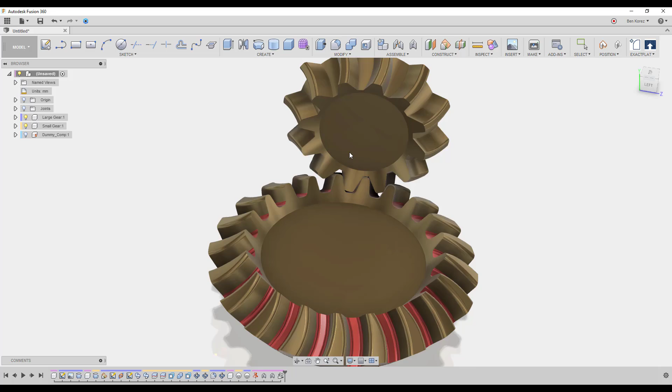From now on, after I show you, I'm also going to add a link in the comments to the file, so you can download it and play with it, and see exactly how I did it - you can just reverse engineer it. I'm also going to show you how you can create an animation out of it, so you can see how it's moving, and it works really nicely, perfectly synced too. I'll show you how to do that as well. It's very simple, so let's start.

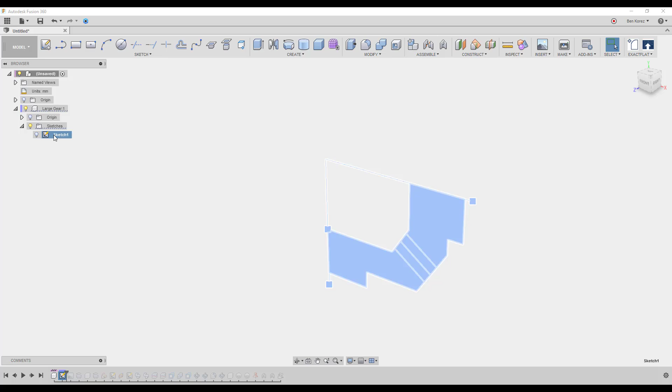Okay, I'm just going to scroll all the way to the beginning here. There's no point starting the sketch from the beginning, so what you can do is scroll like this, then freeze the video and copy the sketch here with all the dimensions. I don't want to waste time, because this profile - just imagine when you have a gear, you cut it in half, and that's the profile, that's how it looks.

I don't know exactly what profile you want, so you can sketch the one you want with the right angle for the cylinders. This here, you can see, is 90 degrees. Maybe yours is going to be less, so you'll do it with fewer degrees. I'm just going to show you a typical one, transferring energy and power from one to another at a 90 degree angle, but it works exactly the same for all other angles, so no issue with that.

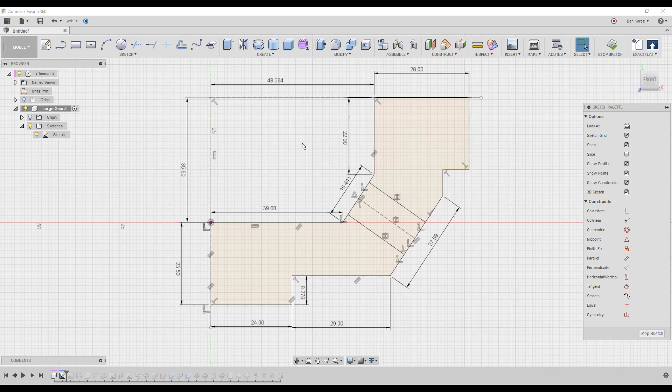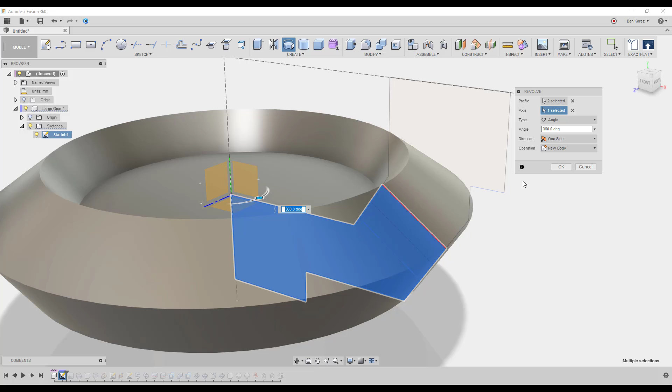So you froze it, and now you're back. Next, we're going to start by using the revolve tool - let me turn this back on. Which one you choose, the top one or the bottom one, doesn't matter. I'm just going to use this one here, and you'll see in a moment what I'm talking about. I'm going to take those two here, and select this line here as my axis center.

I'm going to click OK. Now I'm going to create a new component, and here I'm going to call it small gear. I'm not going to copy the sketch from the first one to this one - there's no point. If you want, you can do it, you can draw it from the beginning, but in this example I thought it might just waste time, so I'm going to borrow the sketch from the big one.

Okay, you can see here I've made a mistake - I forgot to activate gear 1, so the body actually got created at the top root component. So just remember to activate the component you're working on. I'm just going to drag and drop it here - it's not going to let me. Let's see if I need to activate this one maybe. Okay, it's not going to allow me, so I'm just going to go back and try it again.

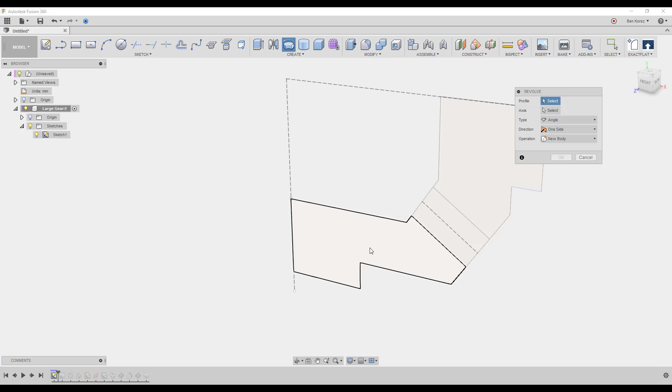Remember, activate it. Okay, so here again, I'm going to select these two here, select the center - it's this one here - and we click OK. And again, we're just going to create a new component.

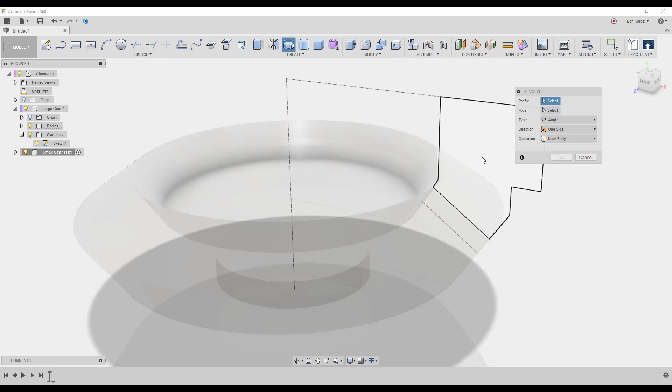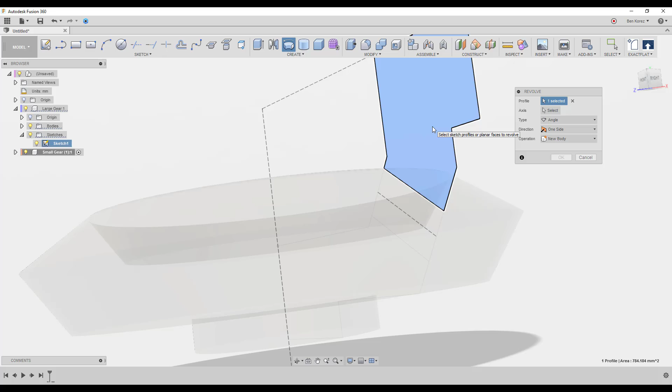Small gear. Good. So as I said before, I'm just going to borrow this profile here, the top one. Again, we're going to go to the revolve, and I'm just going to choose this one here at the top. So the small gear, it's like kissing the other one here, but don't worry, because from the big gear, the large gear, I'm going to cut the profile of the tooth, and from the small gear, I'm going to create a tooth for it.

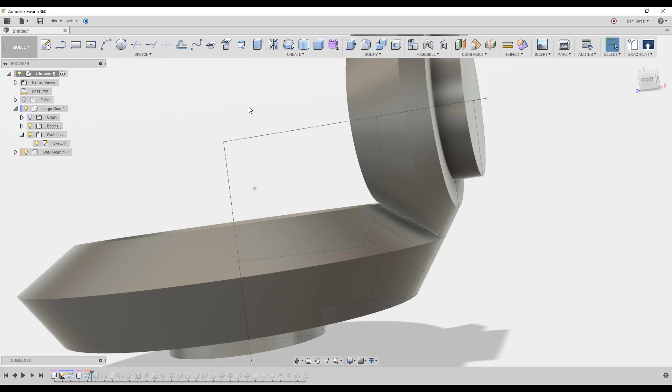And it's very, very simple. I didn't hit it correctly. Here we go. So now we have like two gears. Basically, they are touching each other.

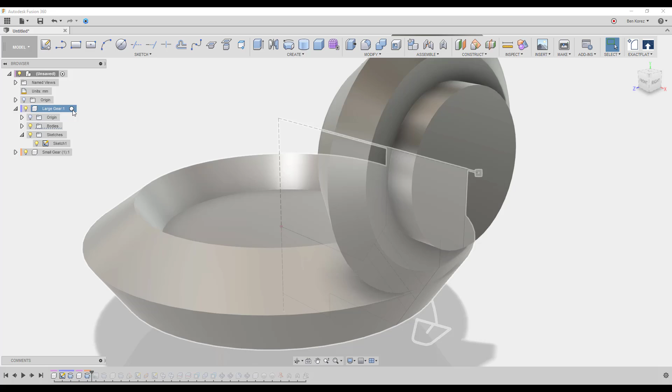Good. Now we are going to work on the gear, but we need to first create the path that we're going to use for the gear. As you've seen, it's kind of with an angle, and so we're going to create it on the large gear. This one we can just turn off for now.

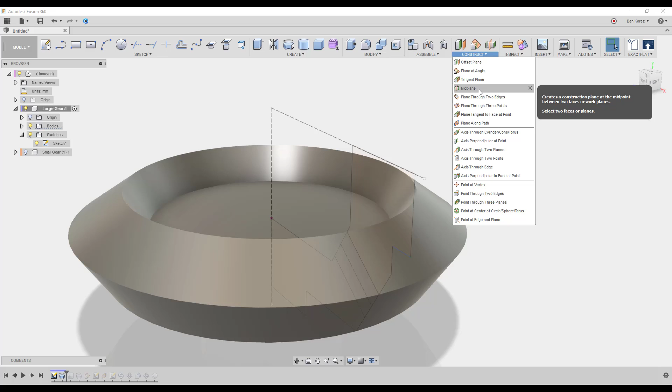Now the best way I found, instead of using a construction line on a tangent plane, it didn't work out as I wanted. So what I'm going to use is the normal plane at angle. I'm going to use this one here, which is close to the surface, and just put 90 degrees, as you can see here. It's touching, and we're going to click OK.

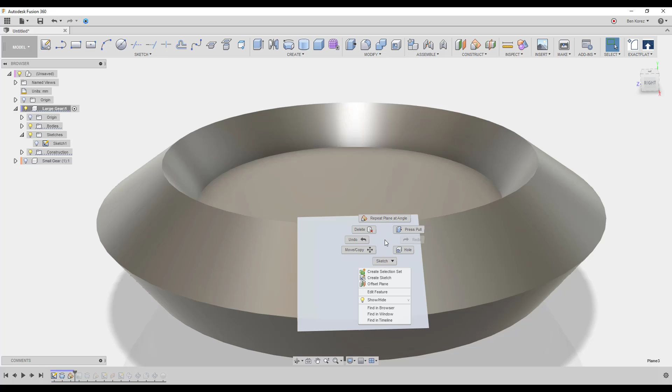Now we can just turn off the sketch, and I'm going to select it, right click on it, and create sketch. So you can see we're right in the center. Everything looks really, really nice.

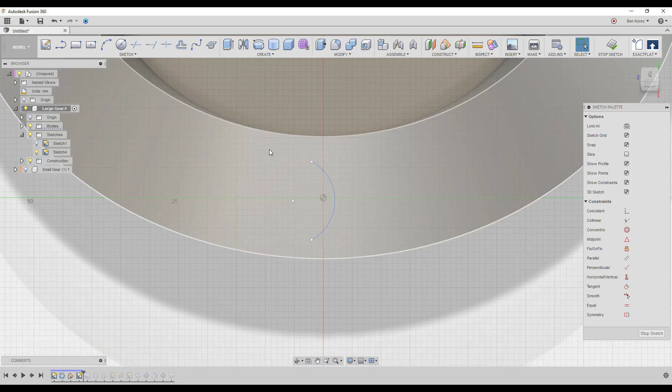So now we're going to take the arc 3 point, that's what I did, pretty simple, and we're just going to draw something like that. And I'm just going to give some dimensions. I'm going to give it, let's just see, 33.782, but it can be any dimension you basically want.

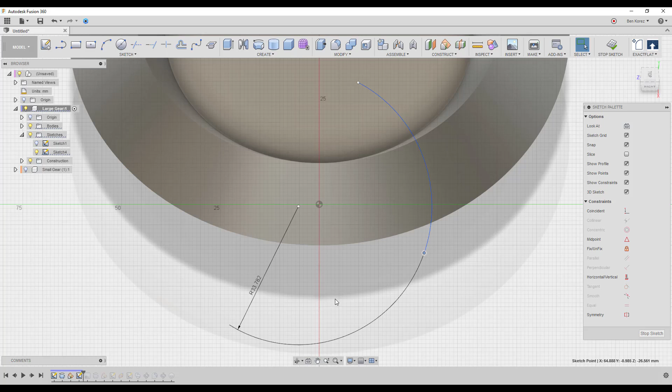And don't worry about this. I know it looks kind of whoa, what's going on, but don't worry. So first I'm going to make a vertical constraint between this one and this one. It's very important. And next I am going to create a vertical constraint between the midpoint of this arc and our origin here. Good. Now the distance is going to be between this point and this point.

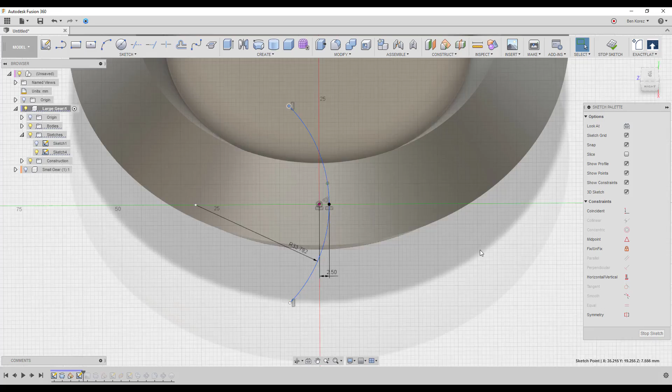It's going to be 2.5, like this. Now this one we can just make it shorter. Let's see. Can make it just a little bit shorter. I don't need it that long. So yeah, I think here it's okay. It's fine. I can live with that.

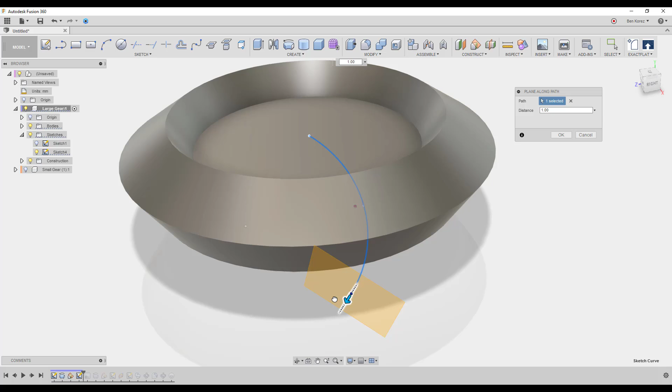And yeah, so here we basically created the path that we're going to use, and you're going to see in a moment how. Now we're going to the construction plane, and we're going to choose plane along path. So we're going to use this one. Make sure that it's at the beginning. If you are changing it, sometimes it can change the shape also, but you can play with that and see if it makes any difference for you. And now we're going to click OK.

We go into this plane, right click and create sketch. Now that, just don't let it confuse you, this is like a little bit, it's not straight, so don't worry about it. So we're going to draw a line here. Now we're working on the profile of the tooth, okay?

So we're going to go to the midpoint because I wanted to create it right here in the middle. And yeah, we're going to create now another line, smaller one right here. Click OK, and I'm going to create a vertical here between this middle and this middle. I want to make sure it's always in the middle, and I'm just going to create a line from here to here and another one from here to here, so everything is equal.

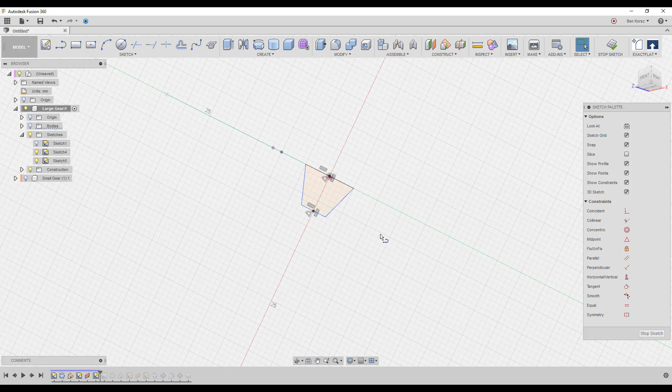And yeah, we're going to start to put some dimensions. 10 millimeters, that's good. Now from here to here, it's going to be 9 millimeters. Again, it's up to you, the sizes. It's just something that I've tested before, and it works really nice. The bottom here, it's going to be 5 millimeters.

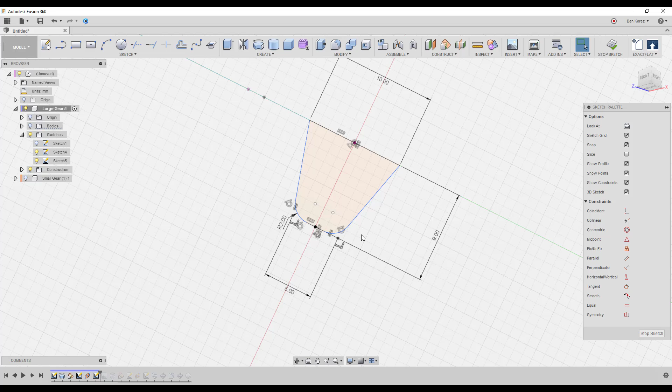And now we're going to create fillets. Normally we're using features to create the fillets, not so much in the sketch or the geometry. Try to avoid that, but in this case I'm allowing myself to do it, and you can also allow yourself to do it, but it's again up to you how you're going to do it. And this point here and this point here, it's going to be 2 millimeters. And I guess that's it. That's our profile, and we can shape it later on if we need to.

If you want to make it round, you can use for example the 3-point arc, or even if you want to go even more wild with it, you can just go with the spline.

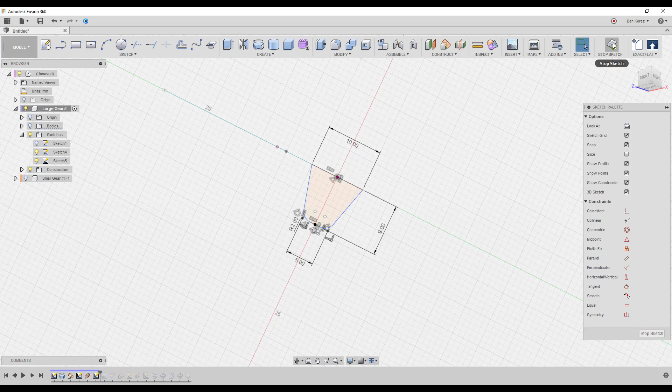So we can stop the sketch. Now we have our profile and we have our path. Just need to turn our body back on. And yes, here the fun starts. Now we are going to leave it as it is here.

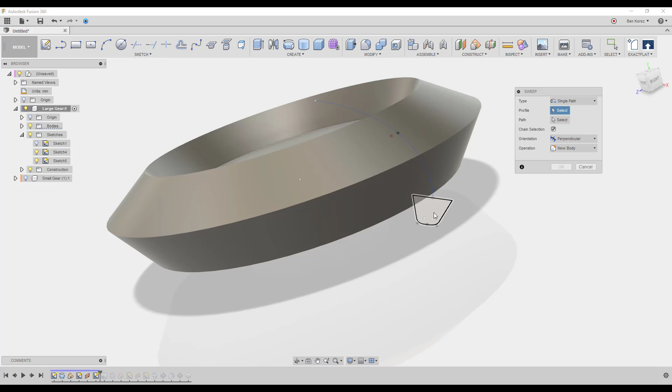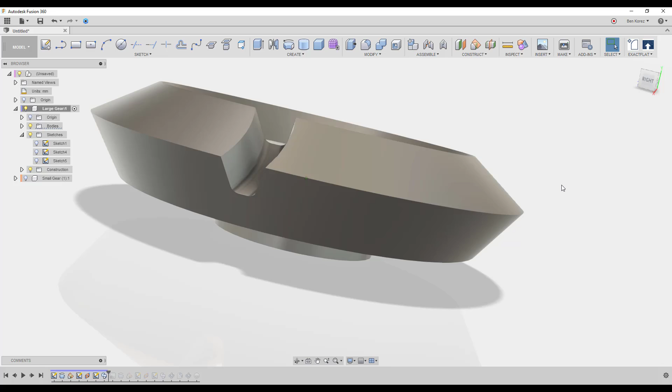We're going to the sweep command. We choose this profile and this path. Boom, we cut it. Make sure it's on perpendicular, okay, and not parallel. Click OK, and here we go. That looks really, really nice and clean cut we've got here.

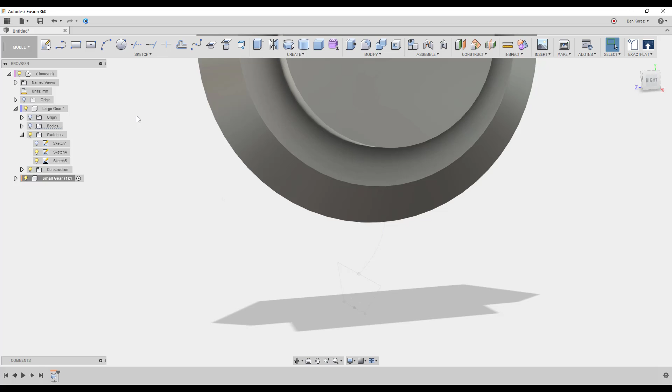Next, we are going to use these 2 sketches on the small gear. I don't want to redo it, waste of time. So what I'm going to do here now is, again, we're going to the sweep. Choose this profile, select path, and look at that. Looks really, really nice. But there is some work to do here.

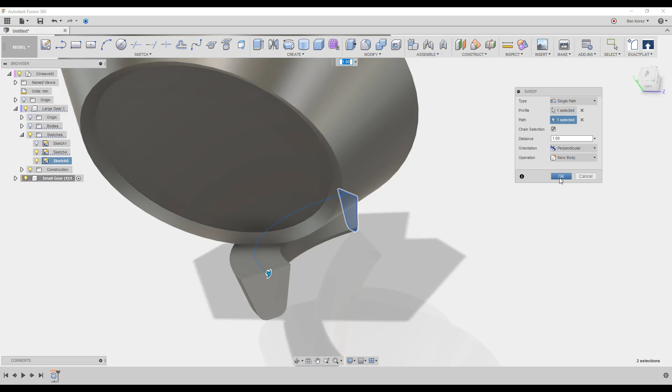I'm gonna leave it as a new body, okay? Make sure it's also perpendicular. If you want to see how it looks, it's a little bit hard to see it right now, but you're gonna see it in a moment, because now we need to cut all those excess.

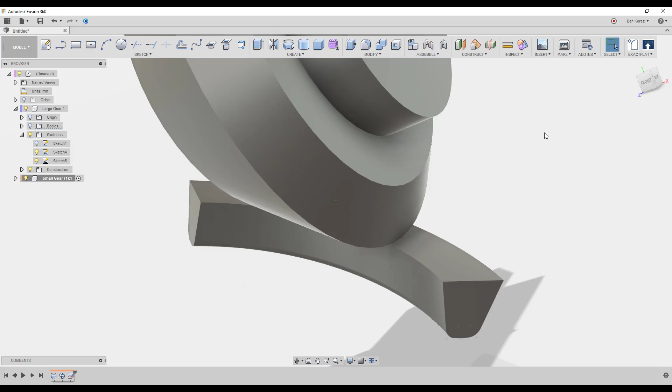It's extremely simple. We're just going on to the split body. We choose this one, and the split tool, it's going to be this face here, and we cut it. Then again, right click, split body. Now we are working on this side here, and we're choosing this face here, and here we go.

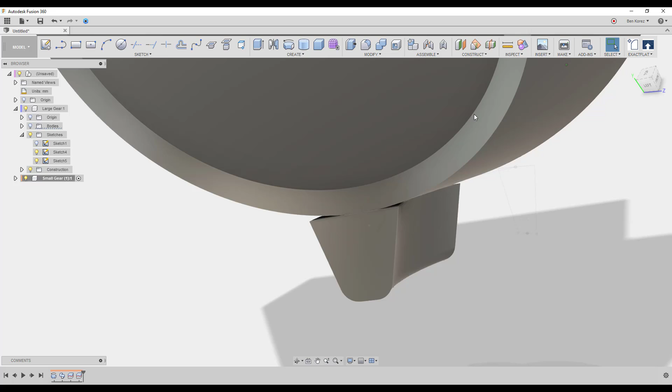I'm just gonna select this one and hit V on the keyboard to hide them. We don't need them anymore. But are we done? No, because it's not 100% touching each other, of course, because this one is flat, straight, and it's not round, so it can't fit on this face. So what are we going to do?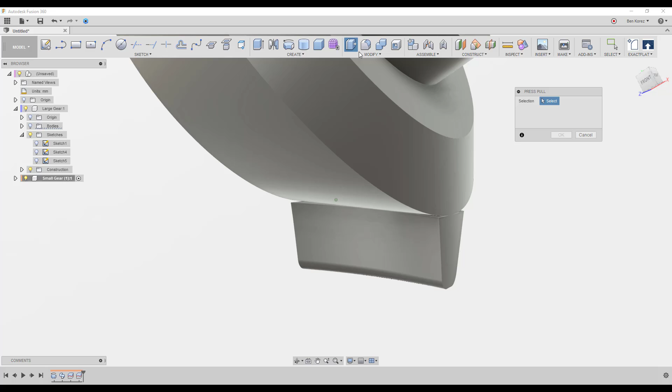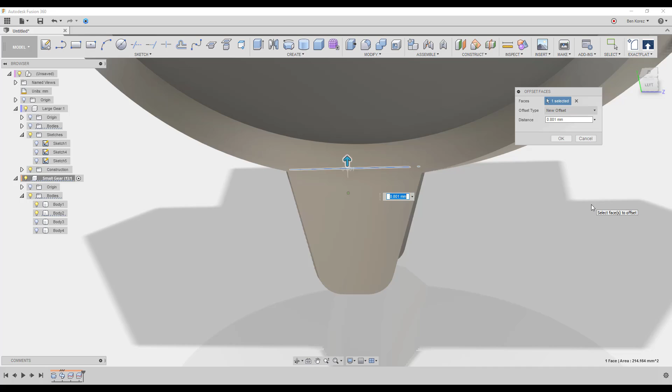Very simple. Basically, we can already now turn these 2 sketches off, and we can just go into the press pull and look for the face here. If you want, to make it easy on us, we can just go in here, turn this one off for a moment, then you can turn it back on. Now we just need to push it just enough so everything is going to be inside, okay, something like that, and we click OK, and look at that.

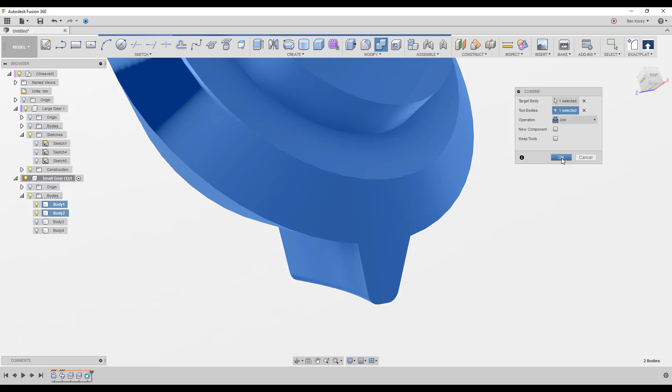Looks really, really nice. Next, we are going to combine it together. This is our tool body, and this is target, and we don't want to keep it, we just join, and we click OK. So here we got our first tooth, and we also have the other side.

So let's see them, both of them together, how it looks. You see it fits perfectly, exactly how we want it. More precise than this you're not gonna get. I don't think so.

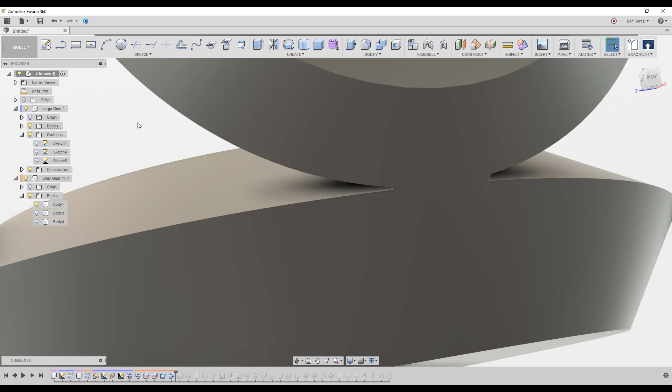Next, what we are going to do, because we need to create some clearance, we need to do it now before we start multiplying everything around. Now you can shave the amounts that you want for both sides.

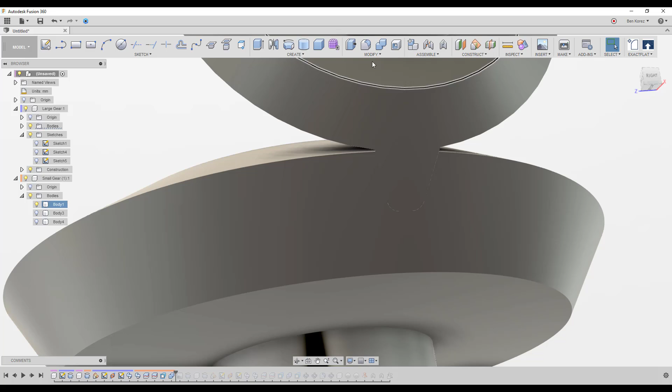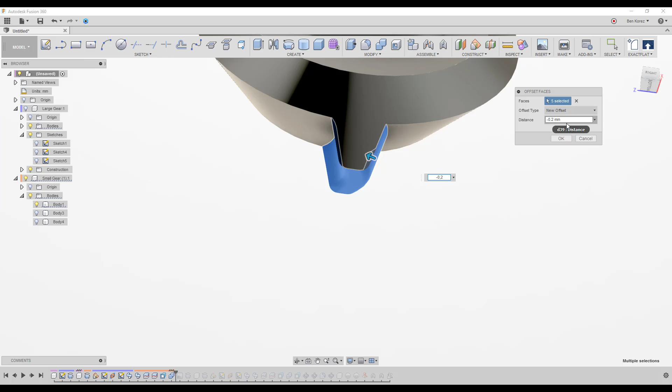For example, let's just say here, we're going to the press pull again. We're going to select those faces because we're going to shave from everything, new offset. We're gonna say minus, to give a clearance of 0.4 millimeters. So I'm gonna shave from here 0.2, click OK. You can always test and see if it's okay.

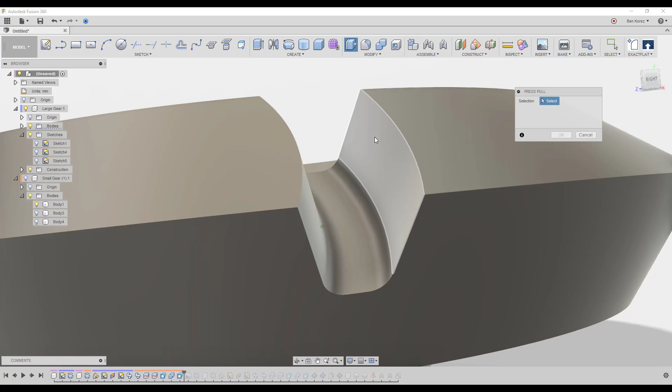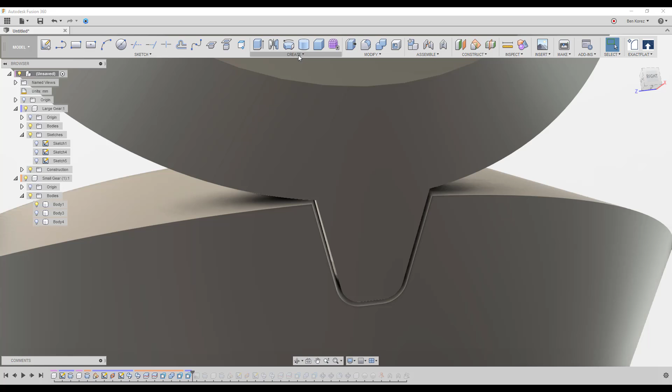And then I can go in and turn this one off and make sure there are no glitches here. Everything looks really, really nice. Go to the press pull here, select all those faces, make sure it's a new offset, and again minus 0.2, and turn it back on, and here you go. So it's equal on both sides. Or you can also, if you don't want to write anything, you can go in here and create some kind of a parameter, so you can just use that.

And yeah, I like it. I don't know about you, but it looks really nice.

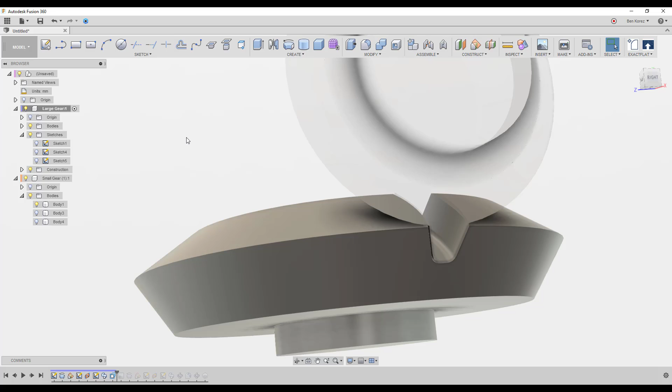So we can start, we're almost basically done. Nothing much left to do.

It's just, you know, use the pattern. We're gonna go to the circular pattern, make sure that it's on faces, and select all those faces and select the axis. Doesn't matter which of them, and I'm gonna give it 21.

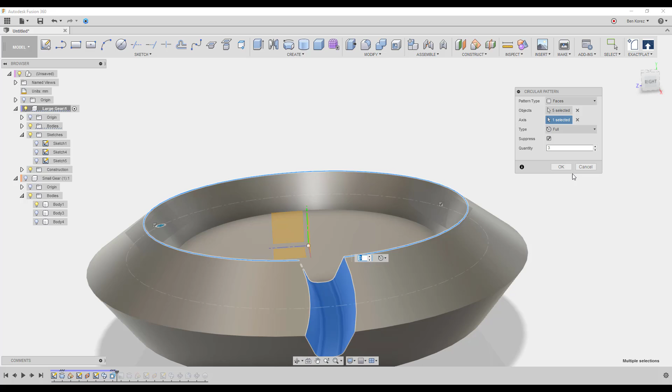It fits really nice over here. There are some websites where you can go and make all the calculations that you need, or maybe you already have everything you're gonna need, the amount, so you can do it yourself. Of course, it also depends on the size and everything.

So, but you know, it's the same, it doesn't matter which size it is. And so here we finish with this one, and we can just work on the, let me just see where this here, the center.

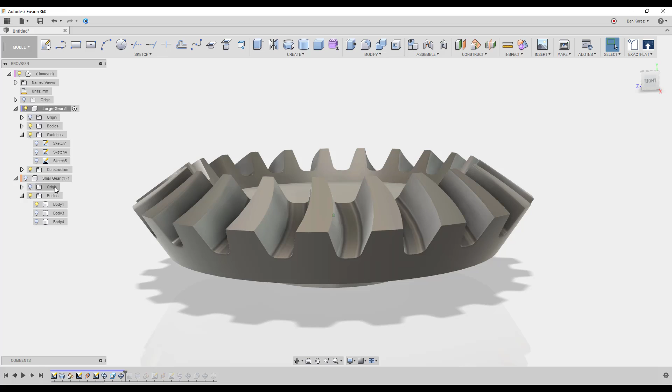Here we can just give them some fillets on both sides. You can also give it 2 millimeters, and here we can just go into, sorry, circular pattern, and we can choose feature. Let's see if it's gonna work.

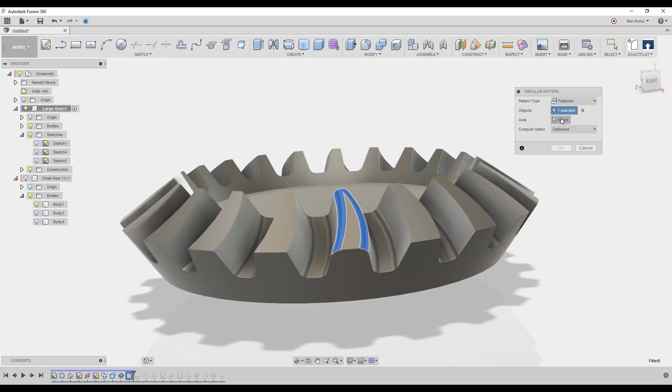Sometimes it's working, sometimes not. Yeah, God knows, I'm just gonna choose this one. How many? 21. And we hit OK. And it worked fine. Excellent.

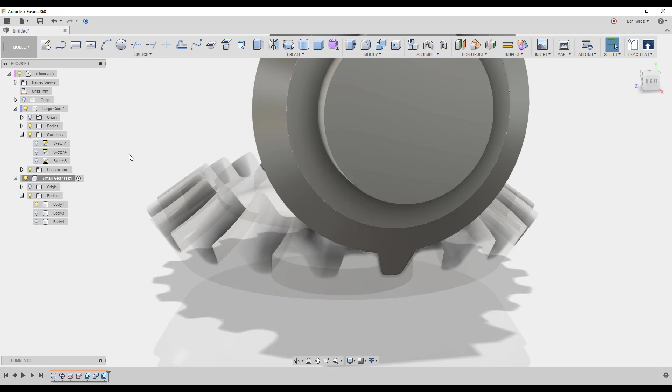Next, what we're going to do is we're going to move to the small gear. Okay, we can just turn this one off for a moment, and everything looks really nice here.

If I want, I can also create some fillets here, you know. I don't know.

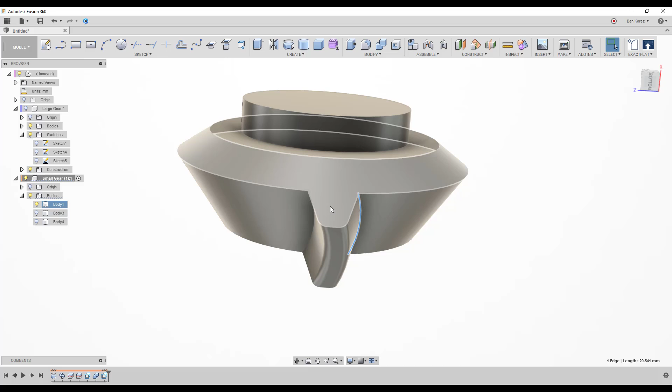Let's make some fillets here, see how it's going to be, and give it also maybe 2.

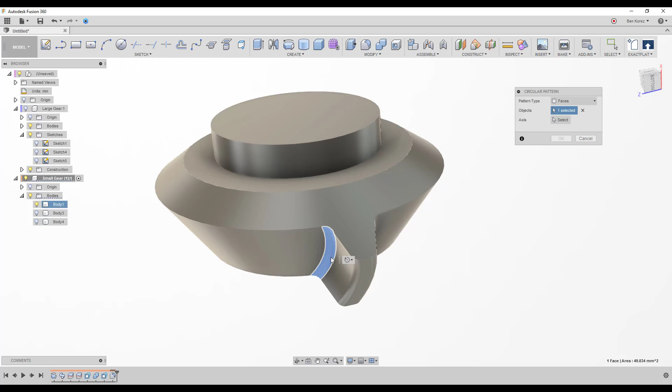And so we go into the pattern, circular pattern. I'm gonna choose faces. I want all of these faces.

And we're gonna select an axis, and we're gonna start scroll up.

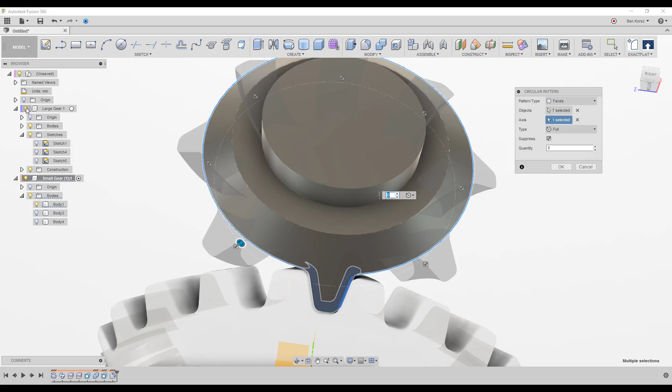I already know how much I need, but I can show you if you're not sure how much you need. So it's quite easy to figure it out. You can just turn the other one on and then just add until you see it fits.

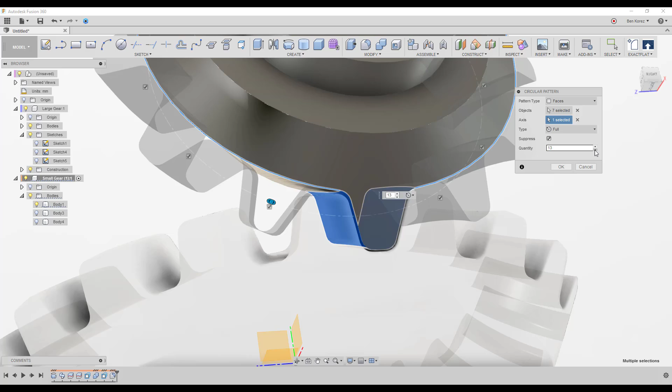Okay, if I'm gonna add another one, you can see it doesn't really fit. It starts cutting into the other teeth, and so I know it needs to be on 12.

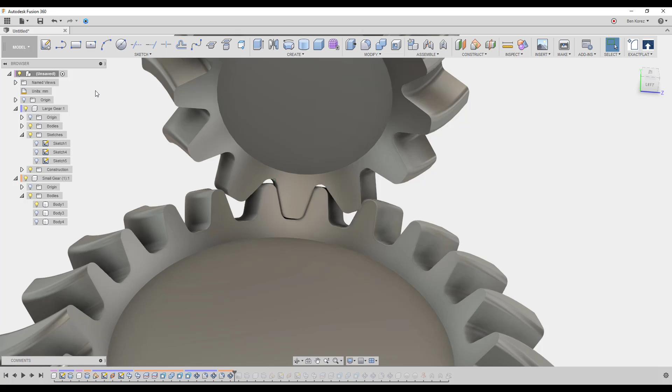And just click OK, and you can always go to the root and you can see exactly how it looks, and if it's enough. If not, you can just add or remove one if it's too many. Okay, so as you can see, perfect match.

And yeah, basically this is it, that's the magic. And those axes, you can just select them and right click and choose remove, not delete, remove, because they are still here in the past.

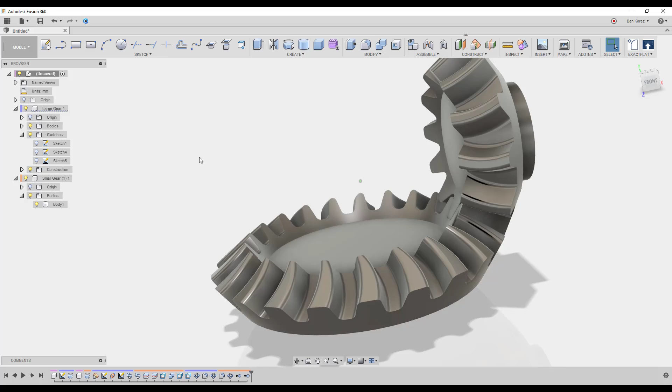Okay, we just remove them from the future. That's all, I'm not gonna delete everything I did before. And yeah, see, because if I'm going back, I regret it, I need them, or the system needs them, it's still in the past, so there is no problem.

So remember that. Okay, so now we are basically finished with them, we're happy, and now we want to animate them or create the joints and see how they work. So let's create the joints.

In order to create the joints, as you probably know, you need one component to be static, grounded. In our situation here, we have two components and they need to move.

So what are we gonna do? We're gonna create a dummy component. I'm just gonna call it dummy comp.

And this, sorry for my spelling here, I don't know, yeah, if you call it like this or some other way. Anyway, now for this dummy component, the easiest way I found is...

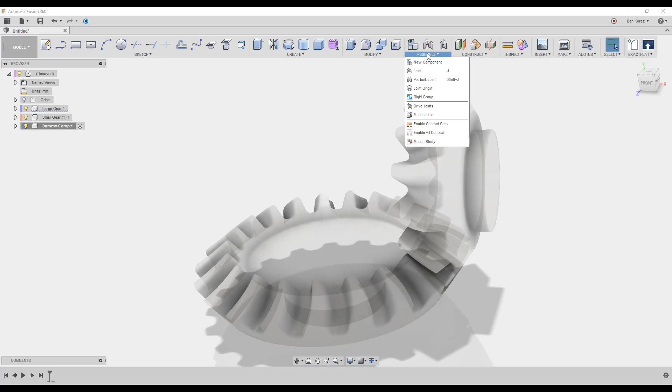...to create a joint origin. If you never understand what you're gonna need the joint origin for, this is one of the things you can use it for, okay? But there is a lot of things you can use the joint origin for.

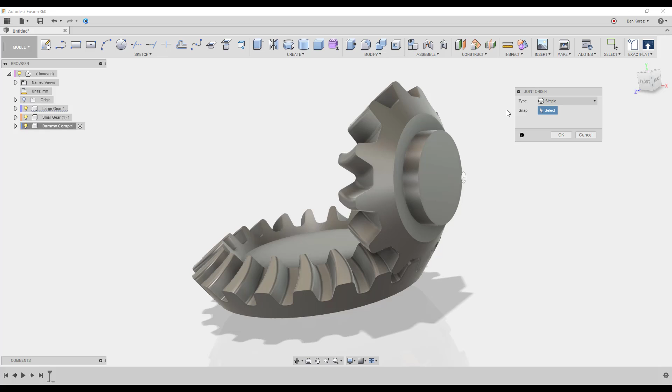This is one of them. So we're going to create a joint origin here, and right click, repeat, and another one here, drag it out.

You don't have to, but I want to. And the next thing we're gonna do, don't forget to right click on this one and hit ground.

Now we can just go into, back to the root component, as-built joint, of course, and set it onto Revolute. We're gonna choose this component and the dummy component here from the browser, because here we don't really have anything to choose from.

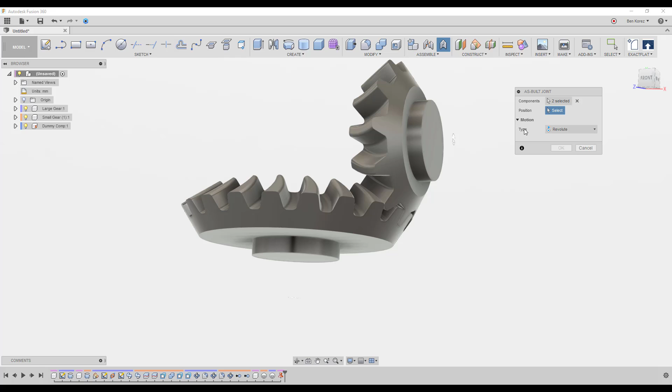And then we're gonna select here the center, and it's turning.

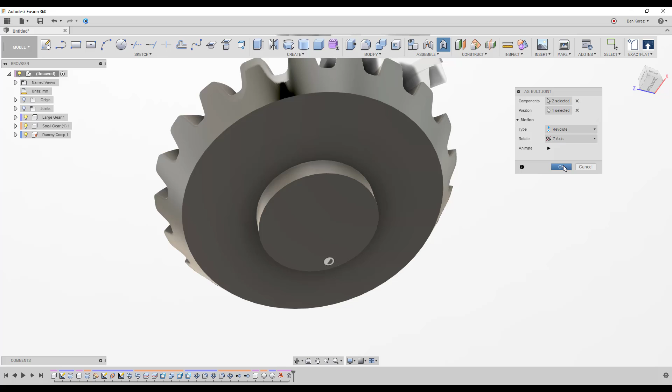And we're doing the same thing for the other one. I'm going to choose this component and the dummy component, make sure it's on Revolute, and click OK. So now we have one turning and the other one turning as well.

What are we doing? How can we animate them? Some of you may know about this already: you can use the motion link. Basically, we're creating a link between two joints, so one joint does something and the other does something else, or the same thing. It can move vertically or horizontally while the other is turning, for example. You can use it many ways, but here, when one turns, the other one is also going to turn.

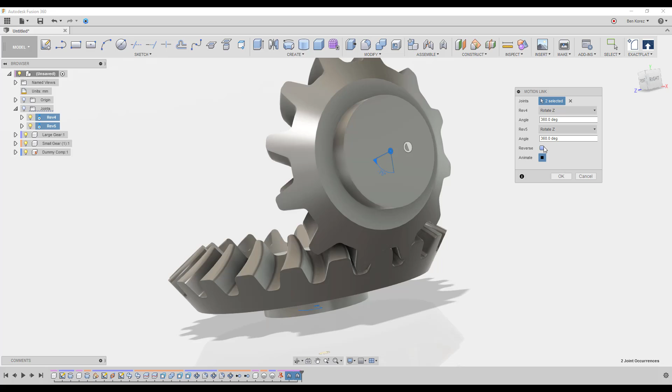So we're going to go to the joints, select one joint, then the second one - they're against each other - and we hit reverse, okay? But the issue here, as you can see, is that it's not in sync. So how can we sync it?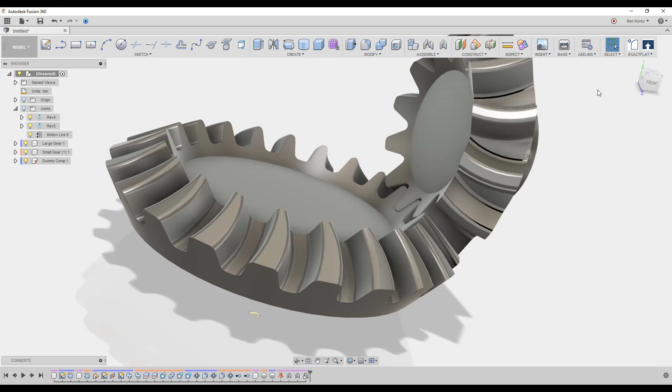Well, it's very simple. I don't know if I should tell you this secret - just kidding. It's about ratio, but in this case, it's about the teeth ratios. So you just need to know how many teeth you have on the small one below and how many on the big, large one, divide them, and then you know how much.

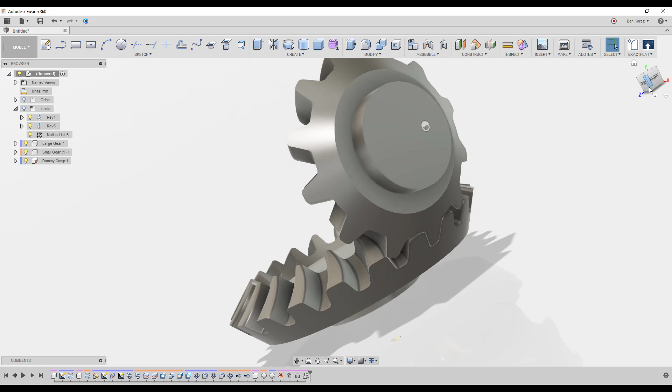So I know down below I have 21 teeth. I'm dividing it by 12, so I got 1.75. That 1.75 I multiplied by 360 and I got 630, which means that's how many rounds the small gear is going to turn when the large gear finishes 360. It's like in a bicycle.

So we're going back, we're going into the edit feature. This is the small one, as far as I remember. And here we're going to write 630. Let's just see if I did it correctly. If I turn this one - yeah, I did it correctly. So now you can see it's moving perfectly in sync.

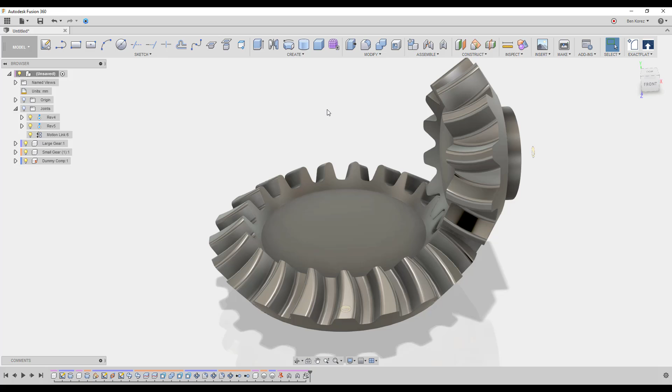It was very simple, easy, fast. You just need to measure the teeth. It has nothing to do with the size of the gears - you know, I forgot the names now, very not good. Let's just see here - yeah, the diameter. So you don't need to do ratios with diameter, you just need to divide the teeth, and that's it. So you saw how I did it, and multiply it by 360. And yeah, this is it.

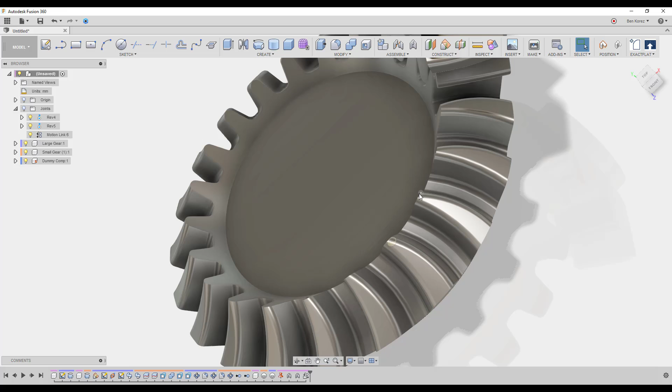And you can create, basically with this technique, any kind of shape for the teeth. You can play with it. You can do the same technique with those that go like this, you know, like a V shape. You can use the same technique with almost any kind, I think. It's quite simple. If not, then let me know and give me a challenge, and I'll see if I can help you with that.

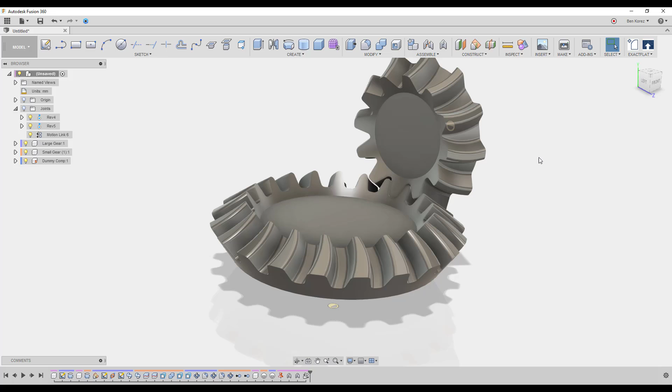And yep, that's it for now. I hope you enjoyed it. I hope it helped you and you like this technique.